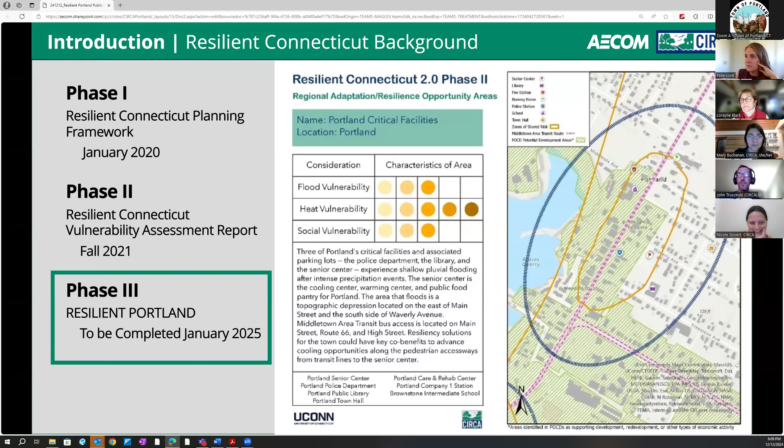As John described, the Resilient Portland project focused on this particular block in downtown Portland. The study includes the police department, the public library, and the Portland Senior Center, all critical community facilities and resources in the center of town. The study area, bordered by Main Street, Waverly Ave, East Main Street, and Freestone Ave, also includes parking to support the facility, as well as green park space and the playground for the community.

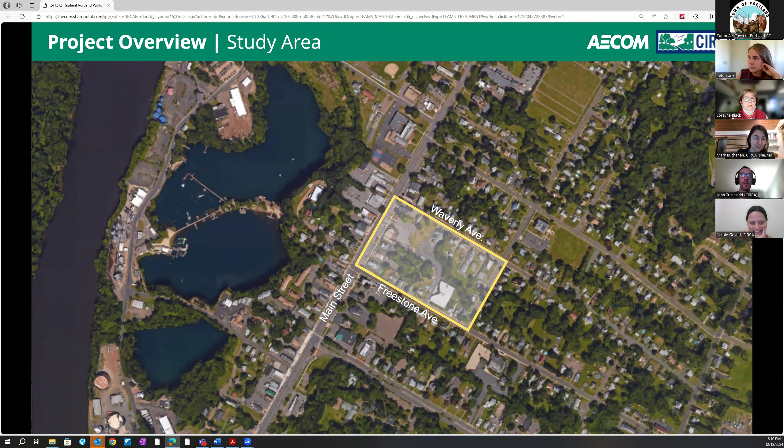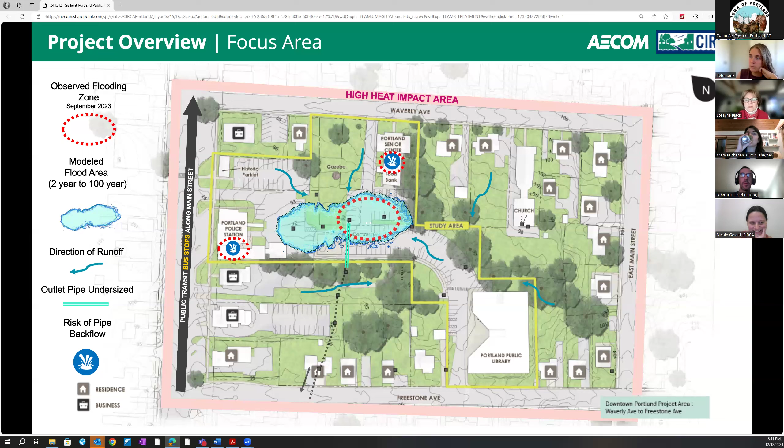The study area is also within a high heat impact zone, and we've noted the lack of existing shade trees within the area, which creates much hotter conditions for people walking, parking, and playing within the study area.

AECOM had a number of site visits, interviews with town staff, and meetings, and we've observed the challenges in addressing flood, heat, and accessibility, with evidence of a lack of trees, large areas of pavement within the parking, and standing water in the catch basins. During one site visit, our engineering team reviewed the existing pipe sizing in all the inlets within the study location, and concluded that one of the main outlet pipes at a key inlet appeared undersized for the system, which may be a main contributor to the backup and flooding in the zones.

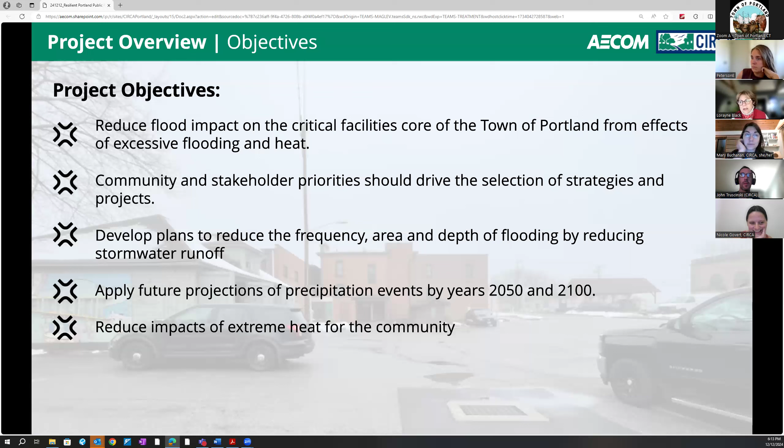Taking a quick look at the project objectives: first, reducing flood impact on the critical core of the town, making sure that community and stakeholder priorities through these meetings and advisory committee meetings drive the strategies and design; developing plans to reduce stormwater runoff and applying future climate and precipitation projections for 2050 and 2100; and lastly, reducing the impact of extreme heat for the community.

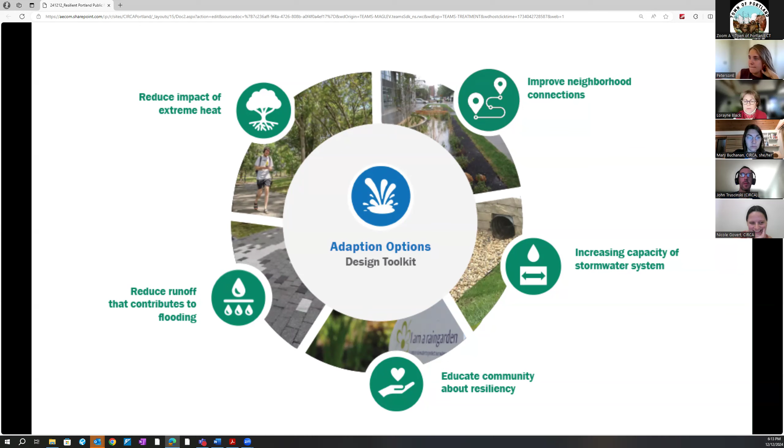As we started to analyze everything we pulled together over this last year, we began by putting together a design toolkit. This is a way for us to approach the final design recommendations. It included reducing impact of extreme heat, reducing runoff, educating the community about resilience and why we're doing this work, improving neighborhood connections to this key location, and increasing the capacity of the stormwater system. Looking at those five design challenges, we started looking at how we can incorporate solutions into a design.

For example, increasing the capacity of the stormwater system by replacing the undersized pipe we observed, which would be able to take additional stormwater from the drainage system.

Reducing runoff using green infrastructure such as rain gardens and bioretention basins, by reducing some of the pavement within the parking area, all helps contribute to reducing the amount of runoff that goes into the drainage system.

It's certainly important to improve connections within the neighborhood, creating shaded pedestrian connections that help make a comfortable environment so folks can connect to the library and senior center.

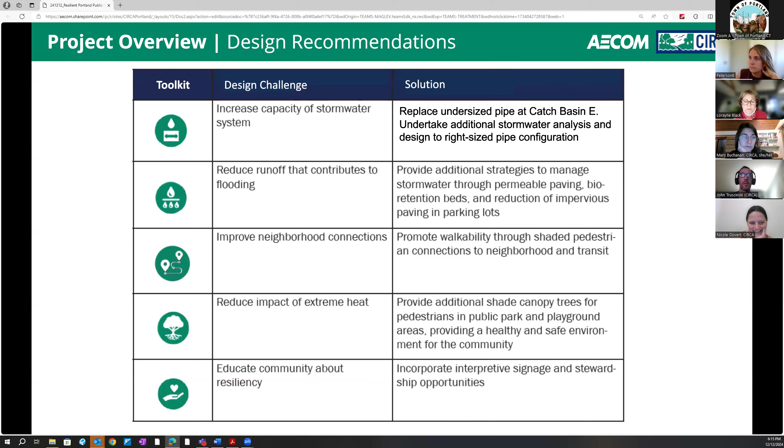Adding shade trees and shade structures within a highly used green space in the playground helps create a space for people to find relief from extreme heat. And understanding the importance of all this work and the difference it makes, using interpretive signage really helps create stewardship opportunities for the project itself.

Now I'm going to hand this over to Ellie Peterson, and she's going to go through the design recommendations that we developed.

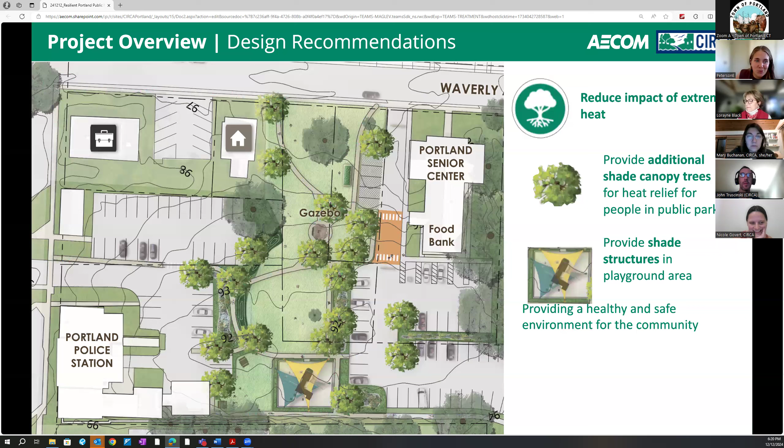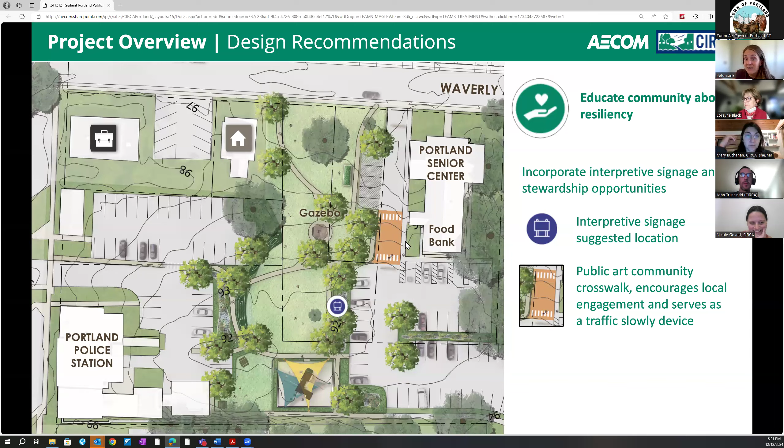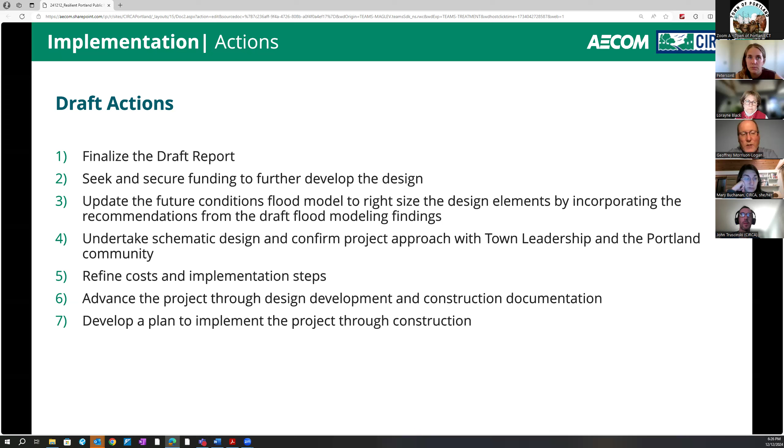In terms of process, let's go to the next slide and where we are in terms of timeline. Jump ahead to that one.

As Lorraine and Ellie mentioned, John and Mary, we've really had a great time working with Dan and folks in the town from the inventory and analysis phase that we did, coming up with several options. We've been working through what's called the cost benefit analysis, where we can understand the costs and some of the trade-offs and funding mechanisms. And as I mentioned, we're very much in the process of wrapping up our final report and packaging that.

So here we're at the end of our process, public meeting number two. We're going to talk to the advisory committee that's been really helpful along the entire process one more time, as a sounding board giving us guidance on how we've been moving the whole project forward as we close things out.

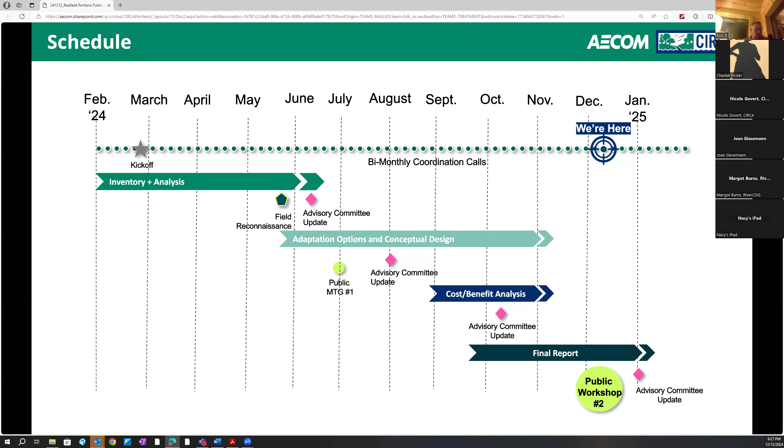So with that, a fair amount of background and update on the final design, we'd love to pause here. Frankly, we have a smaller group tonight, so we can kind of open it up for conversation. We'd love to hear your thoughts about the final design, and we'd love to focus on thoughts around implementation and next steps and how that would work.

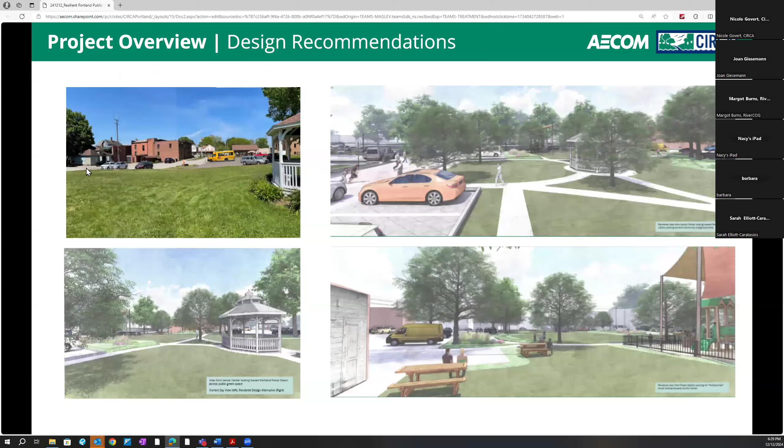Great, I think one of our maps actually shows that system in one of our earlier slides. It shows where it drains to — it drains down towards Freestone Ave, where that ultimately goes out toward the south on this image — but maybe you can bring up the map that shows where that network is as well.

And then we'll pause there and talk about the steps that it would take. Okay, I think it's one of the first ones.

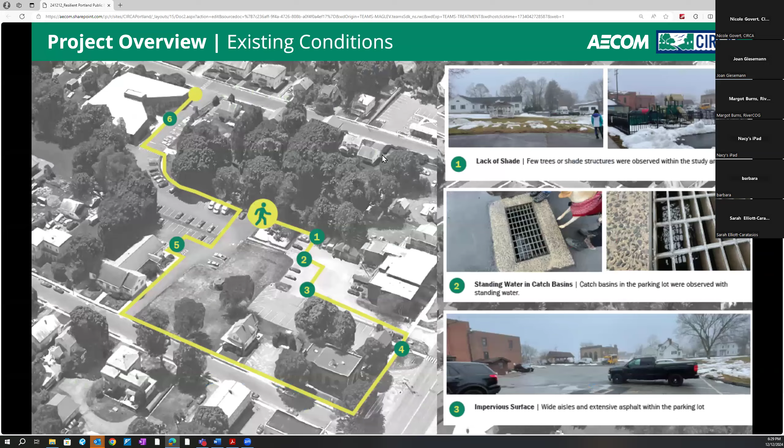The good news is what was discovered during the initial analysis of the system is that the area highlighted in blue is the pipe of greatest concern. We do know this all drains out towards Freestone Avenue, but the other pipes in the system seem to be appropriately sized. It's just that one section, about the same size as the other pipes, that drains into catch basin E. It needs to be larger in order to accommodate the water flow.

Thanks. My other question has to do with the parking area near the senior center. I believe the term that was used was permeable paving. If I got that right, could someone explain to me what permeable paving is?

Yes, that's great. So permeable paving is a paving system where the water, when it lands on the surface, just goes right into the surface, whether it's concrete or asphalt. It has to do with the size of the aggregates that make it up, so there are more holes, and you end up not having runoff from it. It ends up just absorbing through. It's a little bit more expensive, but it removes that amount of pavement from producing runoff, reducing the runoff amount for the whole project.

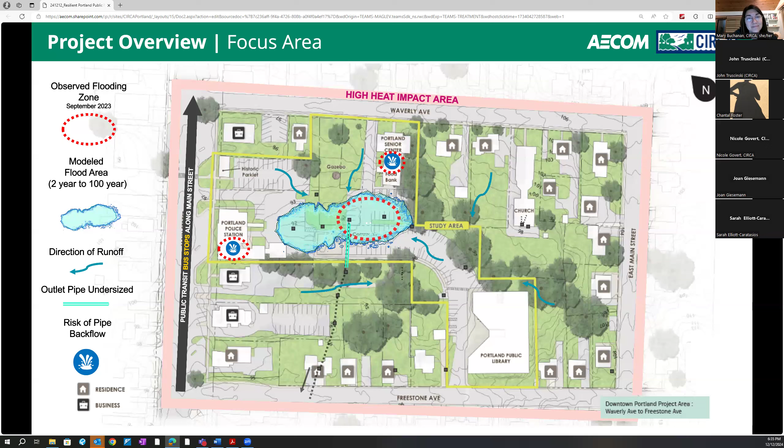Okay, you guys did a great job. Thank you very much. Maybe, Lorraine, while we're doing that, we can advance from the existing conditions into the proposed plan as well—that might help stir up some other questions or comments. Let me know if it disappears, because I didn't know it disappeared before. Yeah, no, we got the preferred plan there. So that's great. Other questions or comments?

See, Sarah has her hand raised. Yes, hey Sarah, how are you? Great, good, great job. Sorry I was a little late getting on.

So I just have a question about those parking spaces there, kind of across from my office there. So are those a definite that they will be put there?

Again, this is very conceptual, so I'm just curious how you would go about to see if this was—I don't want to say safe, but as I've mentioned, how people just really travel really fast through there. I'm just worried about potential accidents and safety for the children that come there, as well as my senior center members.

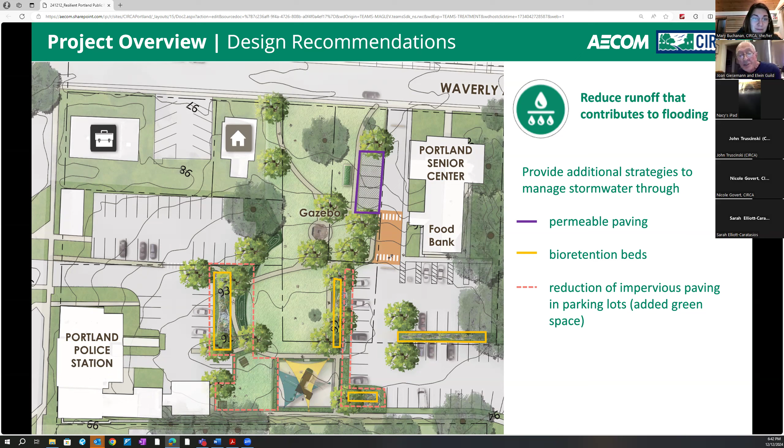It wouldn't be like a drive-through at that point, which I would think would slow down drivers. Let me follow up on Bob's idea. I think you could eliminate the Waverly Avenue access by creating a new access behind the police station. So you would still have through traffic, from Main Street to behind the senior center and to the library, and then out to Freestone.

So, for example, where you come in from the police station to the left, and you came across through what I call the Village Green, just south of that gazebo, and then into the parking that goes out towards the library. And then you could eliminate the one that goes out towards Waverly Ave, if I'm articulating that correctly, right? Yes, that's correct, that's right.

Then you lose all that solid green space. Yeah, you lose the park. Well, you gain the green space where the road was along the senior center. Yeah, so that's an interesting comment. So how do you want to divide your green space and where do you want to have that located? But I totally understand the comment and how that would change the traffic flow through the site too.

And I think that in terms of long range planning, all of the vehicle surfacing should be permeable. There should be a resolution that, beginning today and into the future, any changes in or repair of the pavement would be for permeable material. So that all the area surrounding the police department and the library, all of that current parking surface, would ultimately be permeable. So we can put that into some of our final thoughts, like what would happen if more of it over time became permeable paving, and how that could contribute towards helping alleviate some of the drainage issues, right?

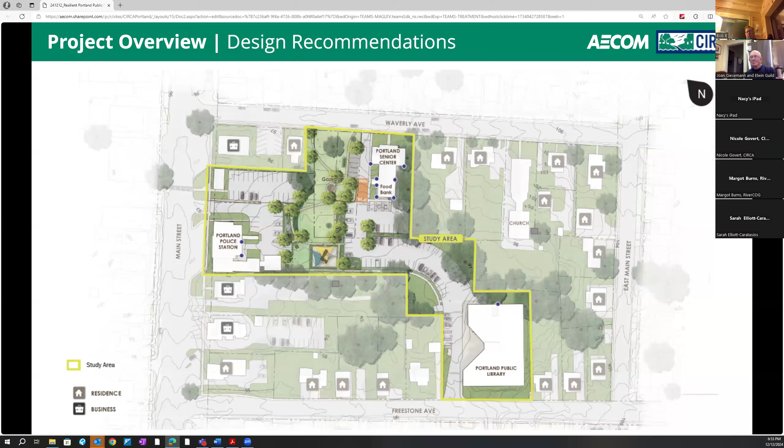Speaking from our perspective at UConn, this program does technical assistance for the specific combination of issues you find here. Wherever there's critical facilities or public infrastructure vulnerable to flooding and heat, those are the places we prioritize in our outreach.

Usually the outreach involves a conversation with the town, confirming whether this is an issue the town has been trying to deal with. This particular issue has been identified in the town's hazard mitigation plan for FEMA for several years, so that's why it came to our attention and why we thought it was a good pilot project for our program.

I know there are other flooding issues in town. This isn't necessarily meant to be a comprehensive flood resiliency plan for Portland, but rather trying to develop some pilot projects at a specific site.

I was just curious whether situations like this existed elsewhere along Main Street. I mean, everybody has flooding—I've got a flooding problem in my basement, but I don't think anybody cares about that. In the downtown area, are there other things similar to this that just don't involve important Portland buildings? It was just a question. But I understand how this got on your radar because it does involve important buildings, so I get it.

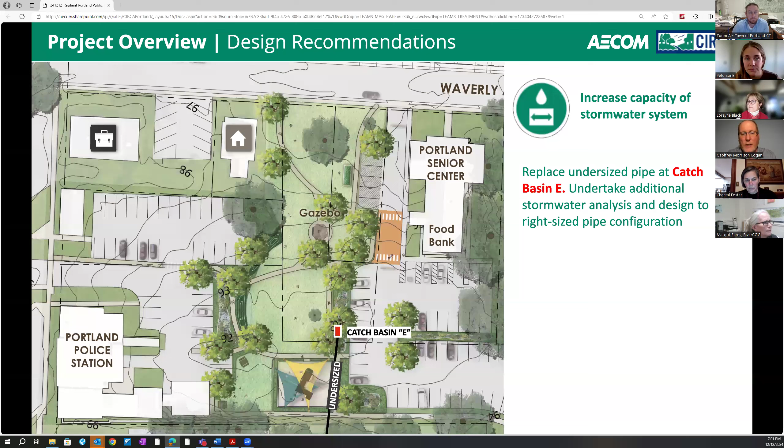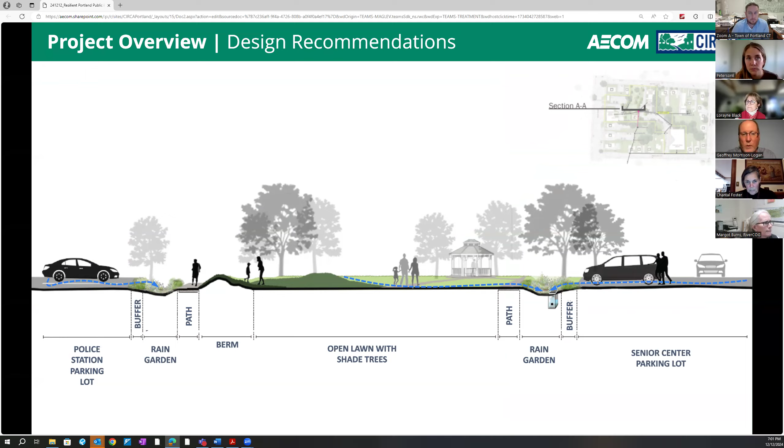So other questions - there's been great questions and comments. Ellie mentioned part of one of the last steps we're doing is looking at that cost benefit analysis and order of magnitude costs. That'll be in our report so the town can start to plan for some of those costs or go after some of those grants and know what they might be eligible for. Many of them involve matching funds that the town would have to work with independent of the funding source. So that's part of our action plan about trying to get you set up for those steps as well.

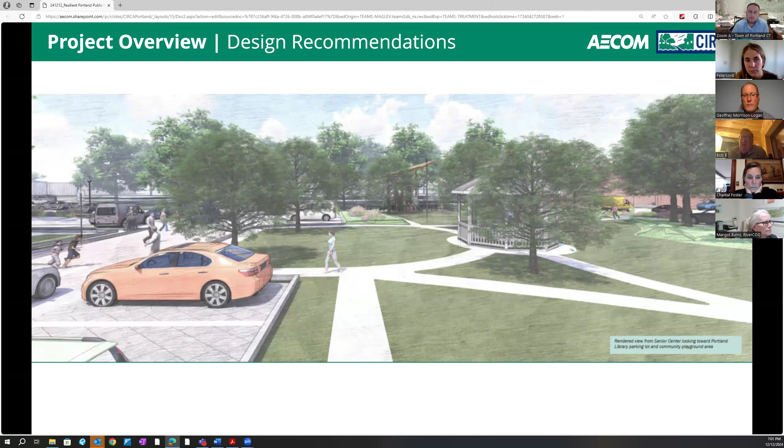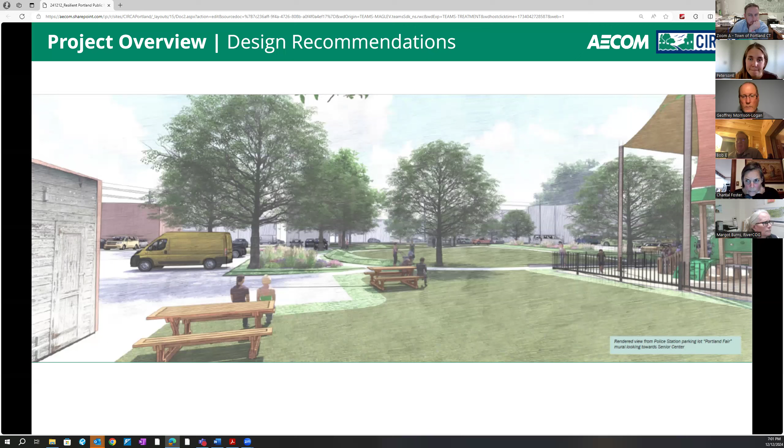Yeah, I mean, it's a build it and they will come kind of thing. I think it could be really beautiful. I do want to put in another vote for the permeable material on the sidewalks, because you're adding a significant amount of sidewalks, which is great, but that kind of takes away from the green. So I think it's a great investment.

Great feedback, thank you. There's a lot more options for permeable material for pedestrian walkways versus for vehicular traffic. So that's very doable.

Other comments, questions?

This could be your town center, Elwin. You never know.

As Lorayne mentioned, we've had a chance to tour this as the consultant team with CIRCA, and it's a pretty interesting and unique little place within the downtown area. All these little tiny changes could make a big difference in terms of moving little pieces around and opening up more land and connectivity in what's a pretty small thing that might be hidden to some folks. Trying to squeeze out every piece of this is interesting. We've enjoyed the idea that these little changes could lead to something bigger. It's been fun to work on from that perspective, so I'm glad folks are into these little changes. A lot of time went into those moves, which could hopefully add to something more significant.